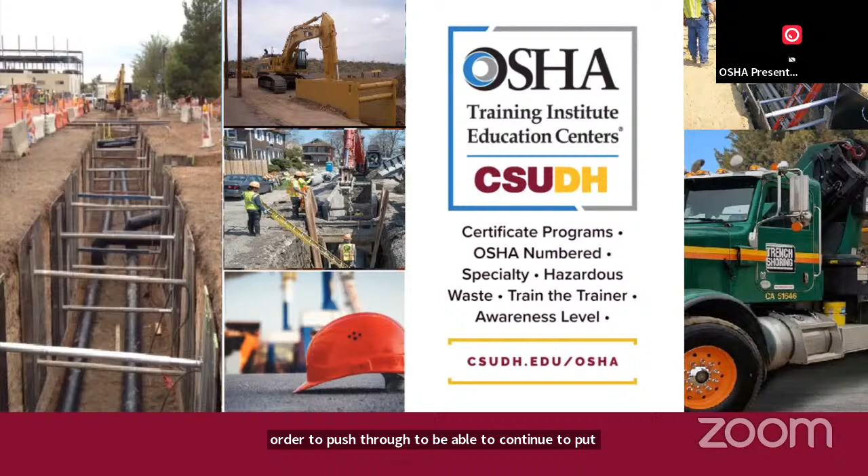So we were able to persevere and push through that through not just our side, but our audiovisual team, our IT team, the support staff that this OTI has, in order to push through to be able to continue to put these classes up there. I don't think we've skipped a beat whatsoever, and we've continued to put classes through, and we have not brought any of our classes to a pause or a stop.

I am the president and founder of a medical company called Shield Telehealth Medical Services. It caters to the correctional health facility where we deal with correctional health, DUIs, medical care for arrestees, Narcan, naloxone training for law enforcement and for first responders and thus forth.

I am also a current sitting police chief in Kern County for a small city by the name of Arvin, just southeast of Bakersfield. So I've been there going on 14 years, never envisioned taking the top spot. Very privileged to be able to do it because climate and culture equals change. And that big word that's out there in every profession, transparency, is what I truly believe about. And we push forward. So that's what I do.

My area is a specialty here, as I mentioned to your general industry, healthcare and train-the-trainer. Like I said, I love being a part of this facility.

I come here and moderate, as much as possible, as much as they'll allow me until I screw it up. But it's coming, I promise you.

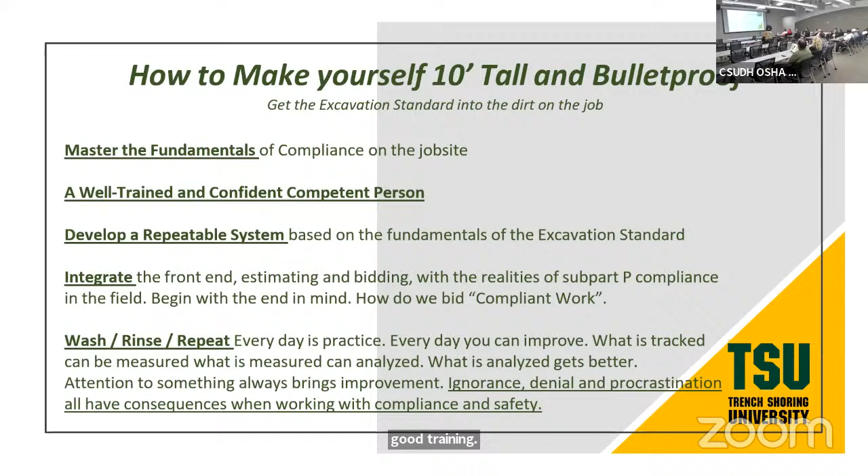So what I start with - I don't know, back in the day, you guys might remember Letterman, right? And the top 10 - we all love top 10. I'm old, so sorry if nobody knows who David Letterman is, I'm kind of dating myself there - but top 10 of the things I see that people struggle with out there trying to do this. I thought it would be helpful to approach it this way.

So number 10, we'll start at 10 and go to number 1: no T1 excavation permit. In the state of California, in order to excavate below 5 feet - and I'll talk about below 5 feet here in a second - you have to have what's called a T1 excavation permit.

To get that permit, you're going to have to submit your IIPP, your Injury and Illness Prevention Program, and you're going to have to show proof of a class like the one I teach, a competent person training class. And usually, I don't think it's policy, but usually they're going to ask you a few questions.

Here's how that goes down sometimes. I have people come to my class and I'll ask them, what do you do? And the guy said, well, we're putting a basement in. I said, oh, I know why you're here. He said, really? I said, yeah, because to put that basement in, you got to dig in the ground, and they asked you for your T1 excavation permit. You didn't have it. So now you're here because you got to take the class. Yeah, you're right, exactly. Okay, so you're going to learn a lot here today.

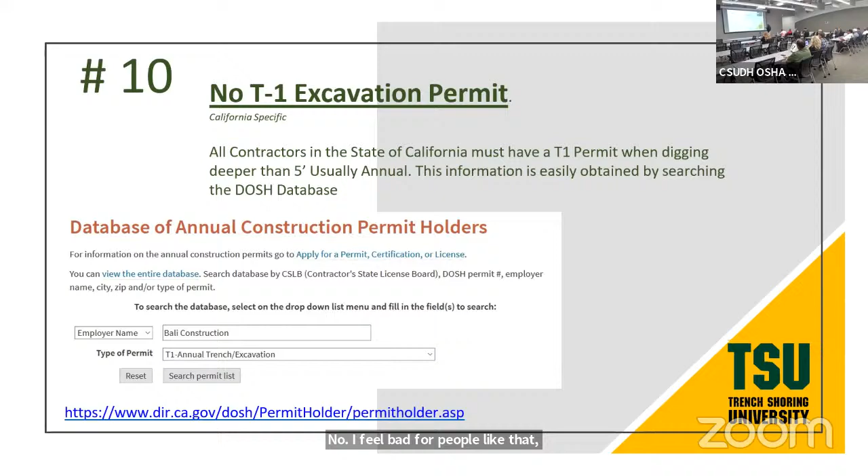All right, number 9. Daily trench inspections done, but not documented. So I got to have a really good conversation with Scott Ketcham. You must know Scott. Because I work with NAXSA, North American Excavation Shoring Association, I'm the training committee chairperson there. Doesn't mean a whole lot right now.

I was honored to take that position from two people who I consider legends in the shoring industry. But what we're really trying to do at NAXSA is figure out how we can best serve the industry as a whole. So we're part of the safety committee now. But the cool thing is I get to talk to Scott and I got to sit down with him. I asked him this very question because it's one that comes up in training all the time.

You see, in the OSHA technical manual, it says document all of your inspections. OSHA will not or cannot cite you for not having something written down, because the standard says you have to inspect. It doesn't say you have to write it down, but it says you have to inspect.

Let's talk about that. So here's the dynamics of how that plays out. So you're the competent person, you inspect, and hopefully when you inspect the trench with, let's call it hydraulic shores, right? So with hydraulic jacks, you pump up and put pressure in the cylinders and they hold up the trench wall. Well, how do you inspect something?

Most people, this is what they do. They call that an inspection. That's not really an inspection, folks.

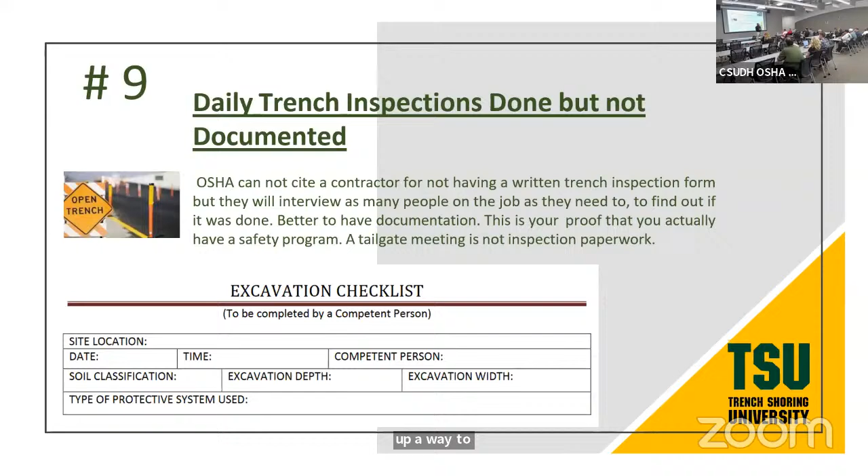Say people jump over trenches because they're trying to get somewhere. If you don't set up a passageway for people to walk through your job site, they're going to go wherever they want. One guy will go here, the other guy will go there. But if we set up a safe way to travel, everybody will go that way. It's something you actually have to do.

So daily trench inspection, not done at all. There's the guys who say we did it, and then there's the people who are just honest and say, no, we don't do that, which is a big no-no. Why? Because obviously there's a reason for that.

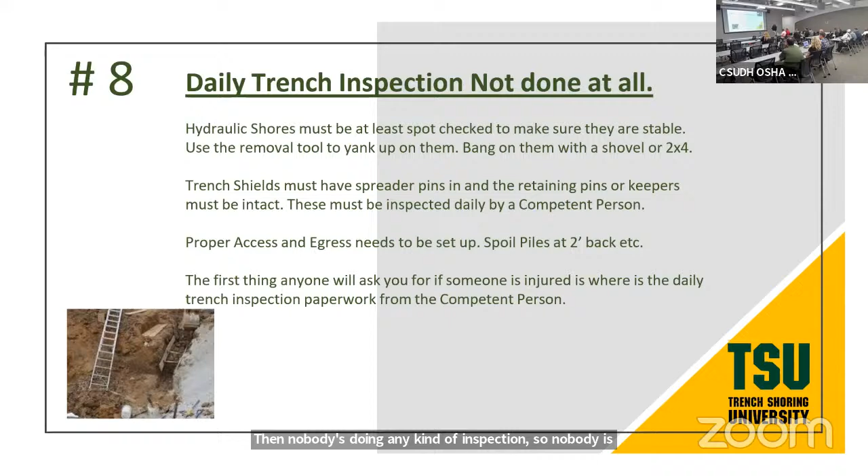When studies are done on fatalities, here's what they discover. Usually these main things aren't done. Number one, they usually don't use any shoring. If there's no competent person on site, nobody's doing any inspection, so nobody's looking at things. There's generally not a whole lot of training going on when no inspections are being done. So that's number 8. Number 7, job site crews not prepared to handle a surprise visit by an OSHA compliance officer.

I don't have many stories, right? So an owner calls me and says, can you believe this happened to me? And I say, at this point in my career, I could believe just about anything because I get a lot of phone calls like yours. So what happened? Well, a compliance officer came to my job site and started talking to my employees.

These are the questions they asked. He pointed to the trench and said, have people been in there? They said, yeah, people have been in there. I said, well, how deep was the trench? He said, about 8 feet. I said, how wide was it? He said, 4 to 5 feet or so. I said, okay. He said, but here's the thing. While people were in there, we had shoring in there. We had ladders in there, we had shoring in there, and people were in there.

And everybody left. We took out the shoring and left the ladder. So here's the problem. They asked, has anybody been in there? Well, they told the truth. Yeah, people have been in there, but there was shoring in there while they were in there. So here's the guy, he's looking at the trench and there's a bunch of footprints all over it. People have obviously been in there and there's a ladder in there. Now he's going to make some assumptions. Well, now the guy's in a pickle because he's trying to say that didn't happen. The compliance officer's just out there doing his job, writing down what he's looking at, and making a report. Same thing you or I or anybody would do.

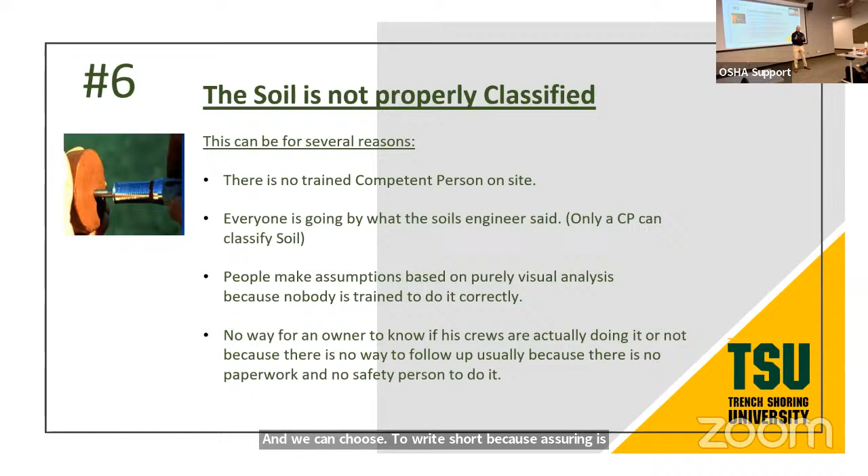And it's not rocket science, it's not meant to be. We classify soil so we have some idea how the soil is going to behave, and we can choose the right shoring, because the shoring is all set up according to the soil type. So we have to know the soil type first, which means somebody's got to be educated enough to actually do this work, okay, actually do it. For instance, with B soil, like I told you, I did that squishy thing, like you're not doing anything. So we show people how to do that.

So I asked him that question, or I tell them this, we kind of go over it in class and they're saying, wow, we didn't know that. Which is amazing to me, because I'm working with this big general engineering contractor. Don't be surprised when you think people should know things and they don't.

So anyway, I said, oh, would you want me to do it? Sorry, I'm going to step over here for a second, the water.

Okay, so we're going to do a soil test. Can you tell that I have fun?

Yes, Kathy, do you have a question? Ingrid asked, how long in advance should the soil be tested before starting the job? That's a great question, wow, this is really cool, I love really good questions. So not like I'm the authority on the subject or anything, but let's talk about that. How long should we test the soil, or how long in between the time we test it and the job starts?

Well, here's what usually happens. You bid the work, you get the work, you're trying to figure it out. So we'll get a call as a shoring company, we get a job, and we will look at a soils report. If we're bidding work, here's what I looked at: you got 40, 60 pages, however it is, blah blah blah, this happened 3,000 years ago, there's a river running through it, this and that, okay fine. I want to see what the soil is every couple of feet, so they'll tell you in bore logs what that is. And then they'll show you where groundwater's at and where bedrock is at, and those are the kind of things we're looking for. So I just flip through all that and go, there and there, groundwater, what's in the ground.

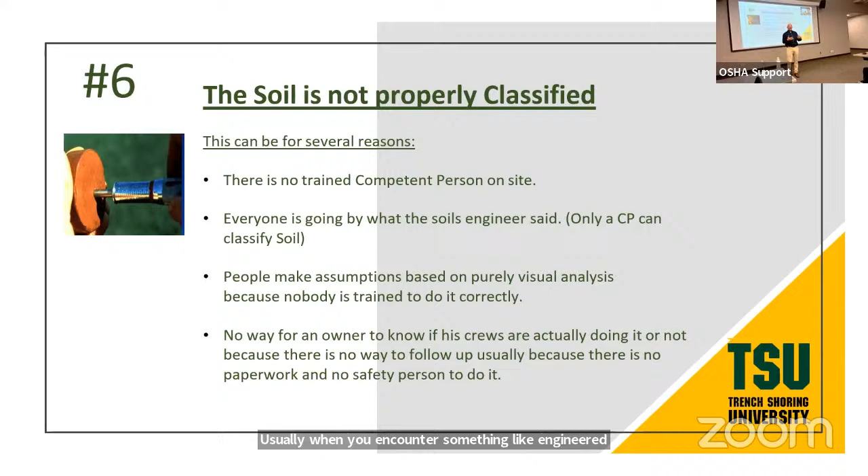As a competent person, you're going to have to sign off on something like that. So I always tell people, look, I'm going to do my own investigation, and if I have an issue with it, I'm going to call the engineer and ask him to come down and answer questions. That's the strength of a competent person. Sometimes engineering-centric companies who live and die by engineering, where that's everything that matters, kind of toss aside the idea of a competent person, to the point where the competent person doesn't feel like they have the right to even question anything. I'm here to tell you that's not the way to go. Why? Because a competent person is there now with the crew. Your engineers out there—I'm sure most engineers don't have a problem with somebody asking them to come down and look at something, if you have valid questions, valid issues. But that's a great question, and it's only come up once in all my training.

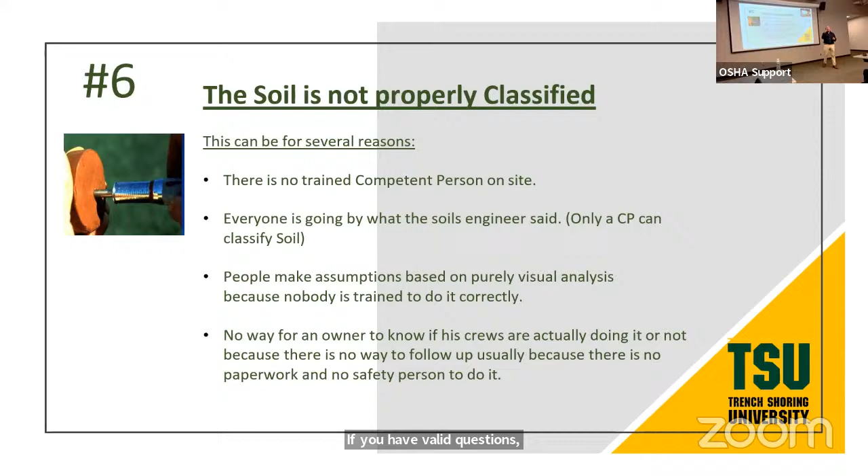Second time. I think we're good.

Number 5: there's tabulated data on site for the shoring equipment, but nobody's read it. Wonder why that is.

Why do you think more people don't read it? Okay, so they don't have it. Why don't they have it? It's online, it's available to anybody. Why don't they have it? They know what it is. They don't know how to read it. Don't know how to read it? Don't know where to find it? All valid, perfect, good answers.

Let's talk about it for a minute. This is our tabulated data, so it's 34, 35 pages, something like that, 38 pages. If it's just this many pages, this big, but you go online, I guess they're bigger if you just download it, 8.5 by 11, it's online.

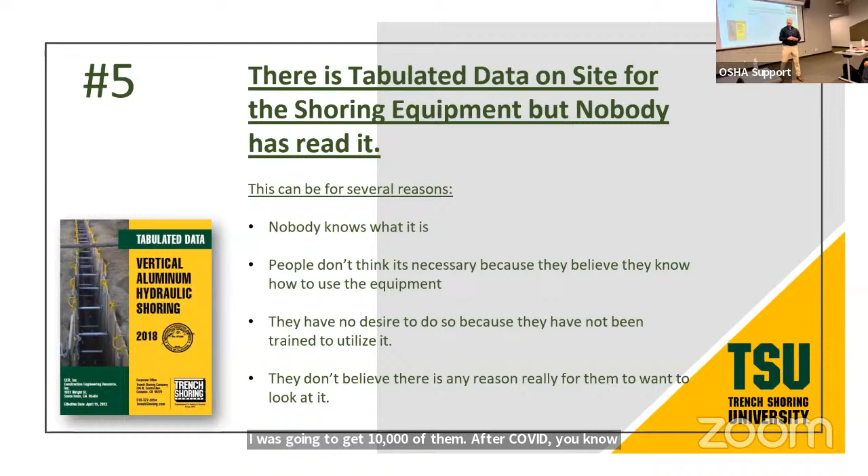After COVID, you know what the guy told us? No problem, we'd love to do that for you, just a kind of an increase in price though, you know, you understand COVID and everything, right? Sure, what am I thinking, 20, 30, 40%? We went from $2 each to $20 each. $20 for one, it's just paper. And I won't even tell you what I said to the individual because I can't repeat it. Just robbery, right? And so this is what happens.

So now we're dealing with the same thing when you go to print out these pamphlets. I'm not sure what the price, I think they were $1 a piece when we started doing it, I think they're probably closer to $5 a piece now, right? And the thing with being a manufacturer of shoring and handing that stuff out blindly to people, it becomes a huge expense, but yet it still has to be done. So I know that we're in the process of printing a bunch of them, but we're also trying to figure out how do we get this information into the hands of people who need it consistently.

Because people won't, we always try to train our desk people, ask, do you have the tabulated data? Do you need a copy of it? Oh, I don't know, maybe, yeah, I guess, or yeah, no, just send it. Okay, so we'll do that. And let's say you order 25 times, 10 shores, 15 shores, 5 shores, whatever, we're going to send out 25 copies of tabulated data. At some point, it gets to be a little bit wasteful, right?

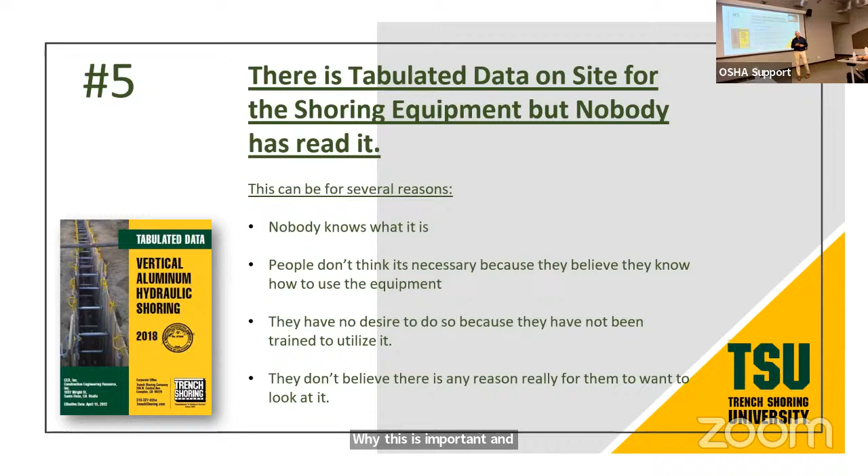Number 4, sloped or bench excavation is not done in accordance with Appendix B. Well, this is how people die. You have to remember that when you're sloping or benching, it's a protective system. You're not just out there scratching around in the dirt. It's done a particular way because that's the way it has been proven to keep people safe.

Now, if you need 32 feet wide to make something compliant, and you've only got 26, then you're 6 feet off. And I use this as an example. So let's say you're 6 feet off, that's 3 feet on either side. I don't know how that steepens the angle from a 45 that you need to something steeper, or from a 34 degree to something steeper.

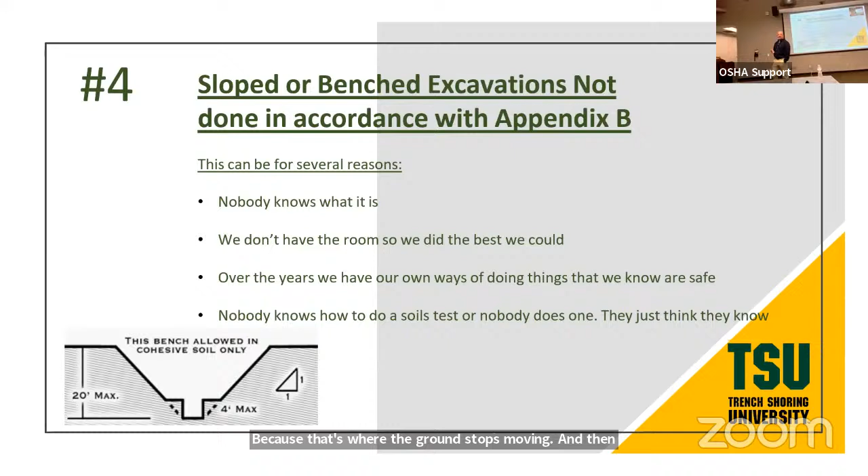But here's the thing. If you know you need 32 feet, because that's where the ground stops moving, and then you step over that line, how do you determine when you step over the line? How much do you step over the line? I mean, it's just a random decision all the time. Do you realize that you're randomly playing with people's lives? Do you realize what you're doing?

Right? I get it, I understand the mentality behind it. But compliance tells us that if we do things a certain way, people will be safe. Now, how do these people know that? Like, what makes them so special?

You see the movie Groundhog Day? There's a part of the movie where it just keeps repeating itself, right? And Bill Murray, he's kind of learned his lesson because he keeps doing the same day over and over again. You'd think you'd learn, right? So eventually he does learn some really important life lessons. But at one point he's sitting down stuffing his face full of cakes and drinking whatever he wants, because he's like, I'm not going to die, so I can do whatever I want. And then he says, maybe God is just God, like he knows so much because he's been around so long.

I really thought about that. It's like, that makes a lot of sense. If you're around long enough, you start to see - I'm 60. Now, a lot of us in trench work have been together for a long time, and I don't approach things the same way at 60 as I did 20 years ago. I'm still here, so I guess I'm doing something right.

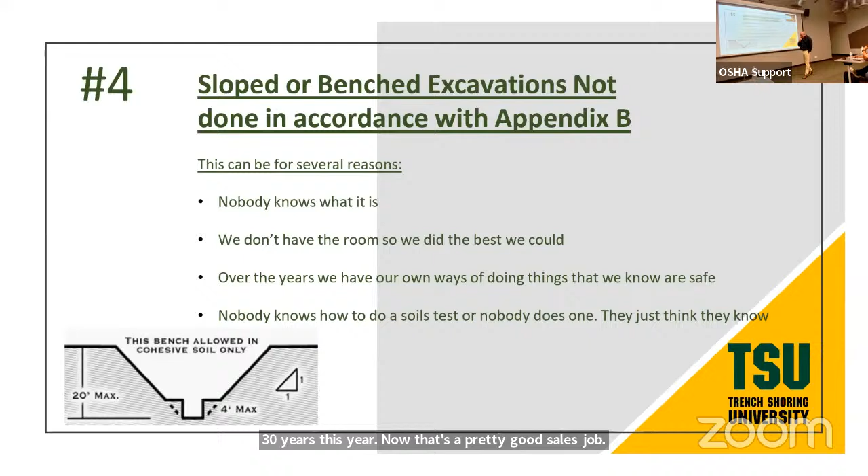I guess the point I'm trying to make here is that there's nobody who has a better idea about this stuff than OSHA. Those things are there for a reason. Man, if we learn to follow those things, we're not going to have all of these fatalities.

NAXSA, our mission at NAXSA, North American Excavation Shoring Association, is to do what? No fatalities, none. Can you imagine? No fatalities due to cave-in, none, zero, zip, nada. Pretty lofty goal. What is that from the movie Miracle? That movie about Herb Brooks and the hockey team when we beat Russia? Nobody in the world thought Russia could be beat.

And he's sitting there at the table with all these guys and he says, well, I think we can beat them. And the guy's like, pretty lofty goal, Herb. You're going to beat the Russian team who won like 19 straight gold medals or whatever it was.

I believe, maybe just stupid enough to believe, that we could do it. That we really could have a year where we had zero fatalities due to cave-in across the United States. Maybe that's why I'm the training committee chairperson, right? Look at that guy, he won't shut up and he's dumb enough to think stuff like that. So yeah, you go, dude, right? You go. I do. I get excited about this stuff because I believe in the human spirit.

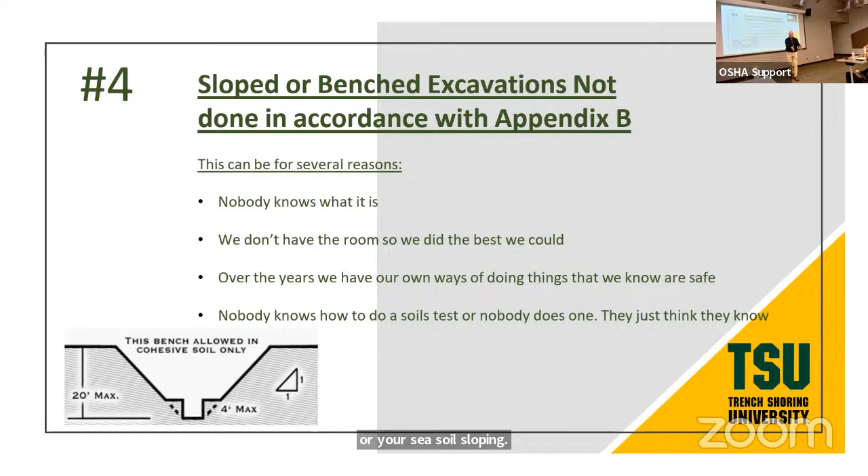There's all kinds of things that can be done when we get engineers involved. We do it all the time at trench shoring. We have C60 soil, that's a different kind of C soil than OSHA. OSHA only allows us to play with essentially sugar sand, OSHA C soil. But all of us who use shoring know of a kind of C soil called C60, or C soil that will stand long enough for you to put shoring in. So we can take that to an engineer and they can come up with some different things, because here's part of the problem: your standard C soil slope or C soil sloping is that pipeline manufacturers want vertical sides when we put pipes in, for pipeline integrity. And that kind of flies in the face of some of the stuff we have here for sloping and benching. So when we get engineers involved, we come up with some really cool stuff.

And the Murray guys are all nodding their head. They know, they've been doing this stuff a long time and they're still here. That's why, because they figured it out.

People get mad at me sometimes. I had a guy stand up in the room and throw his glasses at me because I was saying some things about less than 5 feet. And he said, well, if we believe everything you say, we'll just board this place up because we're not going to make any money, we can't do our work. Aside from dodging the glasses, I just said, well, other people do it. Other people do it, let's show you how. There's always an answer, it can always get done. I know it can be frustrating for people sometimes.

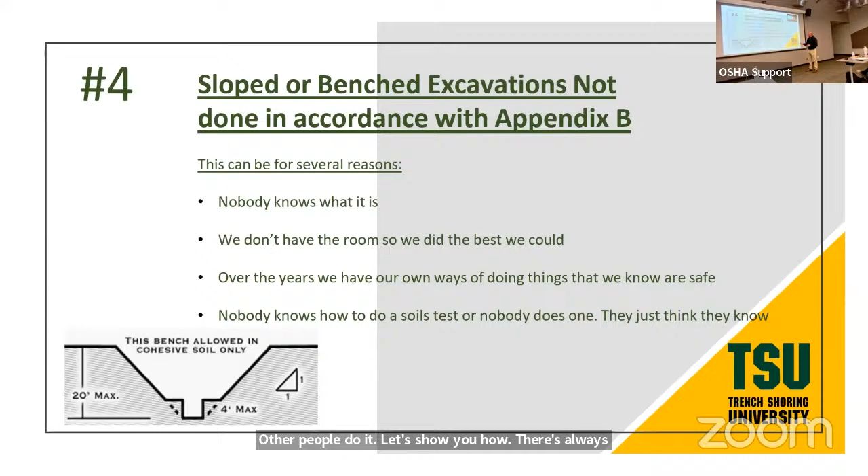Ladders and spoil piles are not managed so they're compliant with the standard. This is just one I really believe of, it's a tough thing to do, people climbing up and down ladders all the time, so they don't set them back where they stick up 3 feet out of the ground.

One of the things I talk about in training is there's 3 things, if you're a competent person, that you need to think about: 1, what I see. So here's a little exercise, think about doing it. When you come back from lunch sometime, get yourself away from the job and come back. What you're going to do inside your head is play OSHA compliance officer. So this is one way you can look at your job, take yourself out of what you're doing, and try and find violations on your own job.

So I come back from lunch. What do I see? Do I see a ladder sticking up 3 feet? We all know it's basically 4 rungs on a ladder, the 4th one being even with the ground. That's basically how you can tell, so it's easy to spot when your ladders are out of whack. Do I see anybody that's roughly more than 25 feet away from a ladder? Your ladders can't be any more than 25 feet away. Do I have trenches out there that are deeper than 4 feet that people are in with no ladders?

All right, do I have spoil piles that are not set back a minimum of 2 feet? Are my spoil piles running to the edge all the time? Do I have spoil piles that are 10 feet tall at 2 feet back?

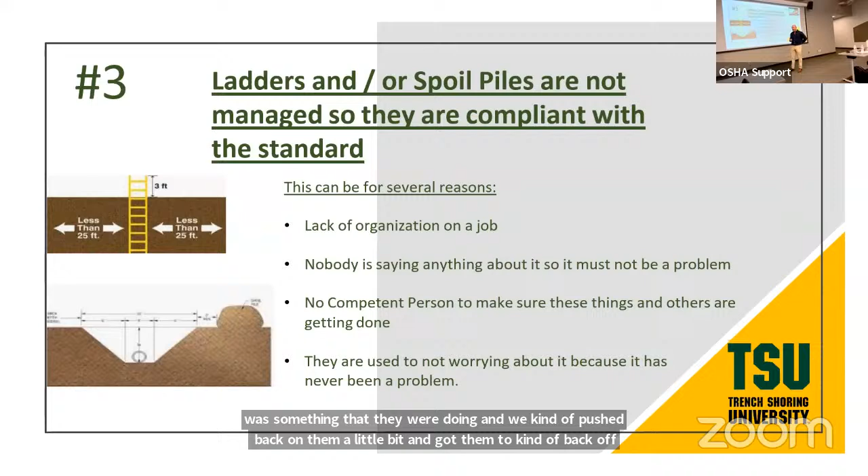So EM 385 is a different animal — it's a US Army Corps of Engineers spec, not an OSHA spec that we're shoring to. In that kind of situation, they were pushing people to test even C soil, and we pushed back on them a little bit and got them to back off, but that was a couple of different bases. It's a great question because it has come up.

All right, I'm going to have to boogie a little bit. No trained competent person on site, number two. That kind of is self-explanatory — you have to have people trained, okay, and good training.

I just did a thing with trench shoring where I was showing all my people about trench shoring. You can go online and get a certificate that says competent person on it for $29, $59, $79. Nothing against these people, I haven't taken their trainings or anything else, but I think the point is obvious.

Menu-driven courses are great for showing a brand new person what this stuff is all about. But training a competent person, I mean, you just listened to me going through a million different things here, and I've only been standing here an hour. My class is 8 hours long, 7 to 8 hours with lunch and stuff, and even then I'm thinking of expanding it to a 2-day class. We do a class here that's 3 days at the university.

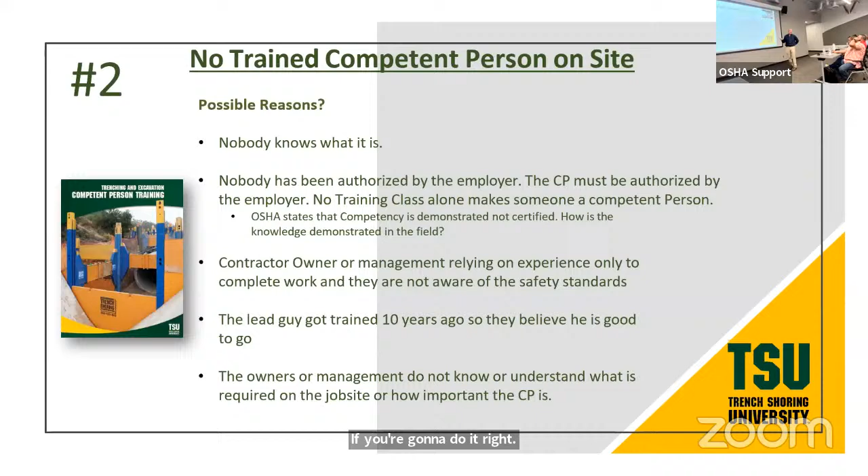So how is the training getting into the field? I urge you to follow up on that because that's the hardest part. Follow-up is always the hardest part. Everybody knows you should get this stuff done, people send people to training and we get our certificates, and I'm a sub, the general says 'I need to see your certificate.' Here's a certificate. Okay, great.

And then I get guys like Warren here who run safety for general contractors like McCarthy, and they say, can you believe I'm dealing with this right now? You can't believe what I'm going through with these guys. Now, we're fortunate, we get to deal with a lot of people like Murray Company, if I can throw that name out there, who've been around for a long time. They'll have issues with people like that.

Okay, so here's another thing. The first thing I said to Warren was, well, who are you working with? 3-bid, low bid, I get it. We all understand 3-bid, low bid. But I remember having a discussion with a guy from the city of Los Angeles.

He's complaining about why they have all these safety violations on their job from this contractor. And I know who the contractor is. And I say, well, you hired him. You can't hire turtles and expect them to run like rabbits. There's a reason why things cost money.

Golly gee, I mean, trench shoring, there's nothing fancy about what we do. But here's the thing, the owners have always said, if we can't pick up something within 48 hours, we buy another truck. You know how much those trucks are? I think they're well over $400,000 each for a boom lift.

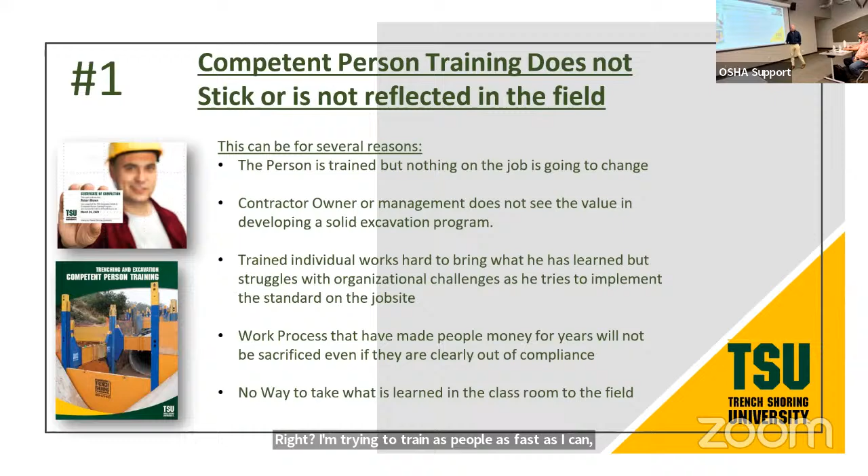I'm trying to train people as fast as I can, but I'm here to tell you that there's people who just don't get it. And they will at some point if they're going to stick around. All right, so here we go.

To end, I'm going to go through this pretty quickly, but successful trench and excavation programs have the following: a top-down understanding of the value and importance of having excavation safety as a real priority, a real priority, a safety pays mentality, and the ability to identify how the excavation standard is reflected in the excavation work they're doing.

A culture of understanding - I'm already late on it, she's giving up on me. Am I right? It's 2 o'clock. You gonna shut me down? Am I good? Okay.

A culture of understanding what the excavation standard is on a job and what it means. A well-trained and motivated, competent person who's 100% supported - huge right here, 100% supported by management. And who reads the standard? Who reads the standard? I say it three times. Who reads the standard? Why do I say that?

Because I have situations where the people in the field are watched over by an owner, general superintendent, whatever. We train the people in the field, but the guy who's looking over that guy or those guys, he doesn't know the first thing about what we're doing.

He doesn't know anything about safety or trench and excavation safety. Have you even read the standard? But you're the guy who's watching to make sure they're doing it. That doesn't work, it seems to be, right?

An end-to-end understanding of what compliance means from estimating and bidding all the way through completion. I talked about that, why that's important, because if the work's bid right, the guys in the field get what they need consistently. Solid communication and respect between the field and the office.

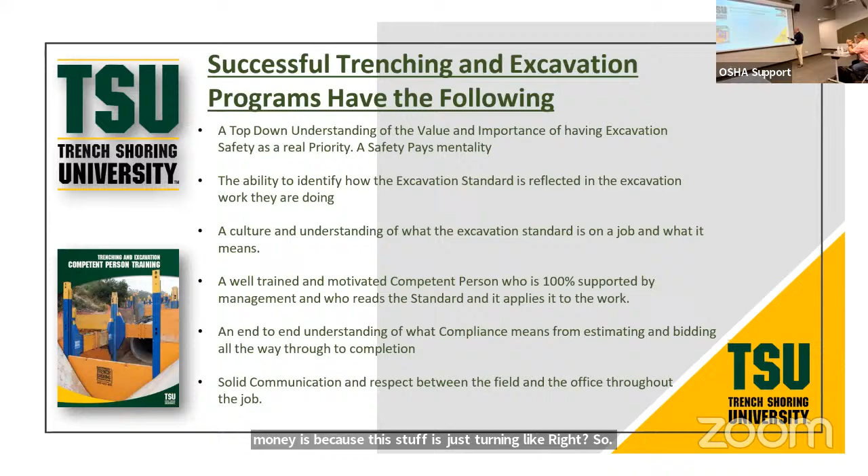So in the fundamentals, we have a competent person. He understands how to get along with people. That's a big part of it. We're all in this together. Use situations that seem to create conflict to learn and teach from. Do this by being committed to reading what the standard says and being accountable to it. Showing someone something is always better than telling them.

Why do I think this is so important? Here's why. If I have a manual, if I have a book, the dynamics of this are amazing. But here's what's going to happen. You and I are talking about something. Instead of me telling you something, I'm going to ask you if you will look at something with me. And when the two of us look at something together, now we're standing here next to each other and we're both looking at something. We're not adversarial.

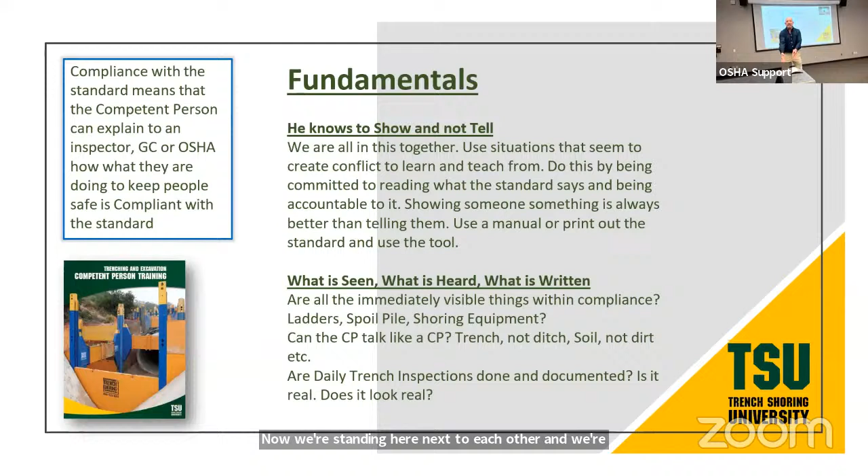When you're standing across from somebody and you're playing a tennis match, ping pong, whatever you want to call it, it's adversarial. When you take the dynamics and you change them to two people looking at something together, you create a whole different scenario.

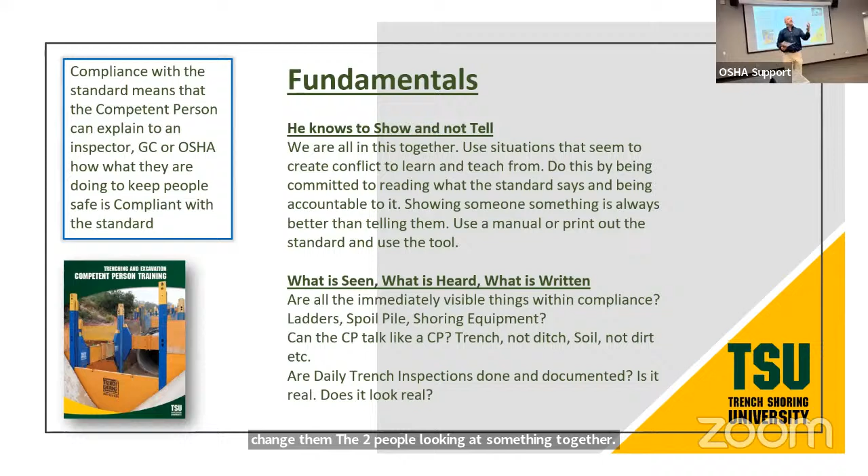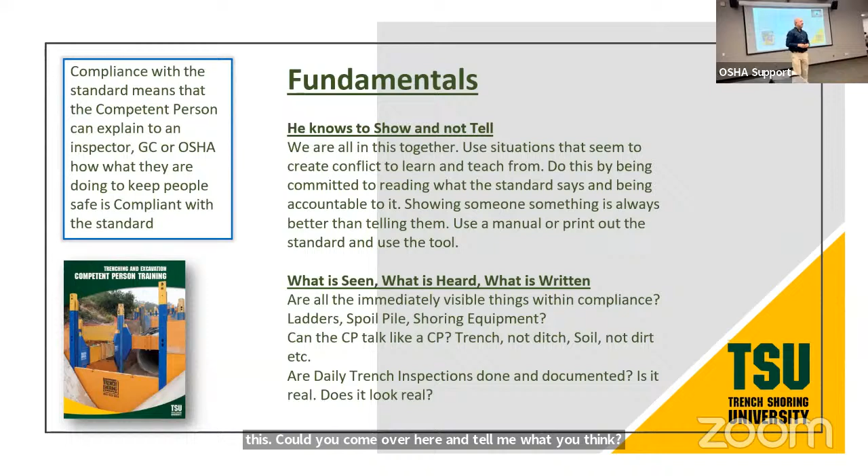I'm not sure how things are going. You're working with a contractor, whatever. We've talked a lot about this. I was looking at this. Could you come over here and tell me what you think? What do you think about this? When you have people that can think about things like that, everything works so much better.

I talked about what is seen, what is heard, what is written. We talked about engineering and how important that is. Tabulated data, the appendices of the standard. The competent person knows how to read and apply all this stuff. That's what we do in class.

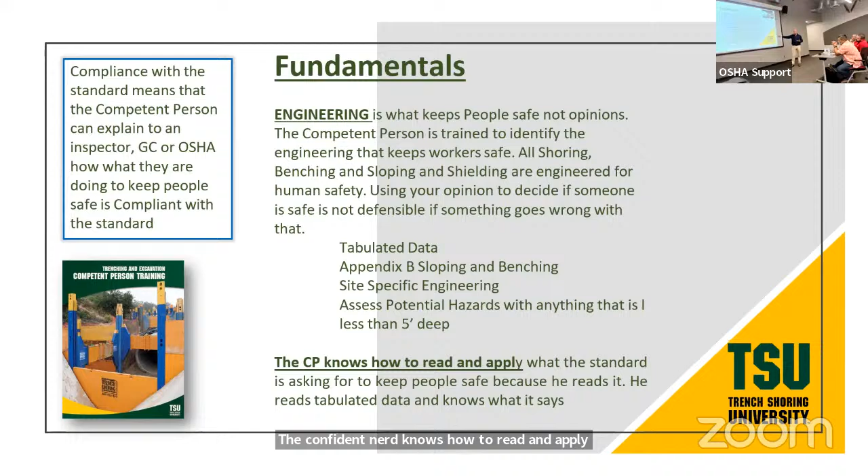Good training, engaging and interesting, draws people in and makes an impact, creates an opportunity for engagement, builds people up, empowers them, gives them confidence, creates a pathway for success in the mind of those that are trained, and creates a resource to draw from in the future of the job.

The standard is taught through real examples by somebody who has more than just book knowledge, but practical experience, with opportunities in class to demonstrate what it's learned. These are all things of training. One of the greatest questions somebody asked me one time, we were quoting them and they said, tell me why I should take your class.

Wow, I wish everybody would ask me that question, right? Because people just sign up and send people in. They don't even vet it out.

They don't even know, repeatable system. I talk about McDonald's a lot in my training, but the thing is, we all go to McDonald's at some point. Why do we go? Because they produce the same thing over and over and over. We know what it is, and no matter where we go, it tastes the same, and we can get it in 10 minutes. That's it. Not because it has incredible nutritious food or any of those reasons. They're a Fortune 100 company because they produce a repeatable result.

So that's what we're trying to do. We're trying to get people home at the end of every single day. How are we creating a repeatable result where we can insert people into a system?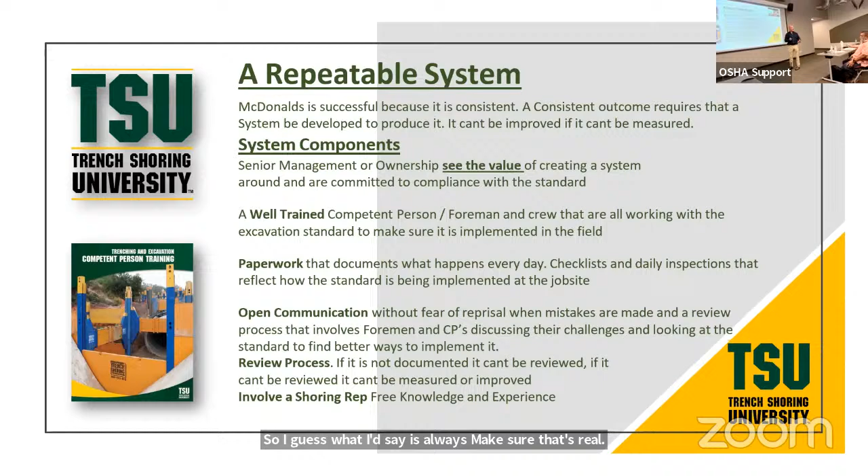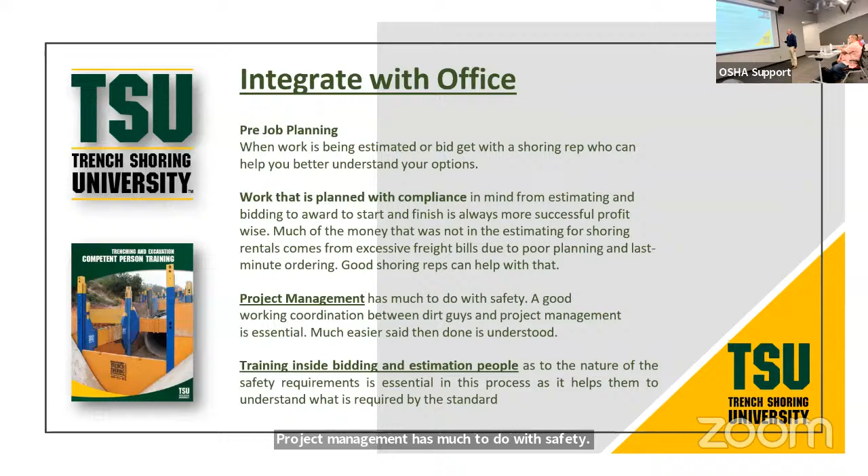Integrate with the office - I've been saying that a lot. Project management has much to do with safety. A good working coordination between dirt guys and project management is essential. Training inside bidding and estimation people too, right? We talked about that. Resources.

I'm always surprised at how often I overlook things that are here for free that I never take advantage of. That's a perfect example - who we are, the trench shoring company. I spend a good half hour in my training helping people understand that, and that's why we have reps come to my training, because most people don't even know that's available. A culture of safety - I think we all know what that is.

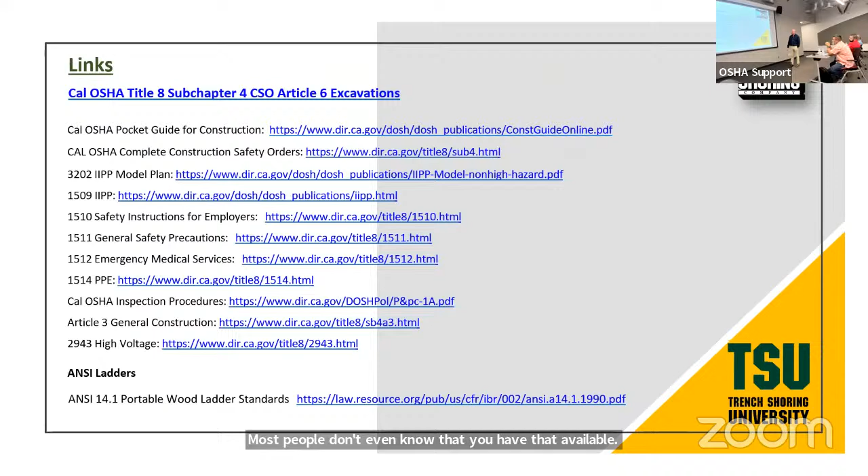And I've gone way past my time, as always, because I don't think I've ever met a timeline. I'm grateful to you guys for letting me continue to yammer on, because as you can tell, I'm passionate about what I do. But I guess it's time for questions, if we have any time - maybe that's all gone too. So I don't know, I'll let you guys figure that out. Questions? Everybody's like, no more, please. Okay.

So my question is, what is the best method of soil testing? Great question. Well, I can just give you my best, okay?

The only reason I think I'm qualified to answer this is because when I worked for the military, the Navy actually brought me in and said, we want to train like 500 people, and here's the deal, we can't pay you. Typical government thing, right? Want everything for nothing, and yet I got to pay, right? But here's what he said: if you do it, I'll expose you to every single contractor working on a base here at Camp Pendleton. They'll have to come to these trainings and you can meet everybody and get cards. Okay, there's some benefit there. And that's how I got on at Camp Pendleton, and I was a fixture there for a long time.

Now what worked? So we had everybody out there in groups of 5 people - I had maybe 10 groups, 50 people at a time. And we went through all these soil tests.

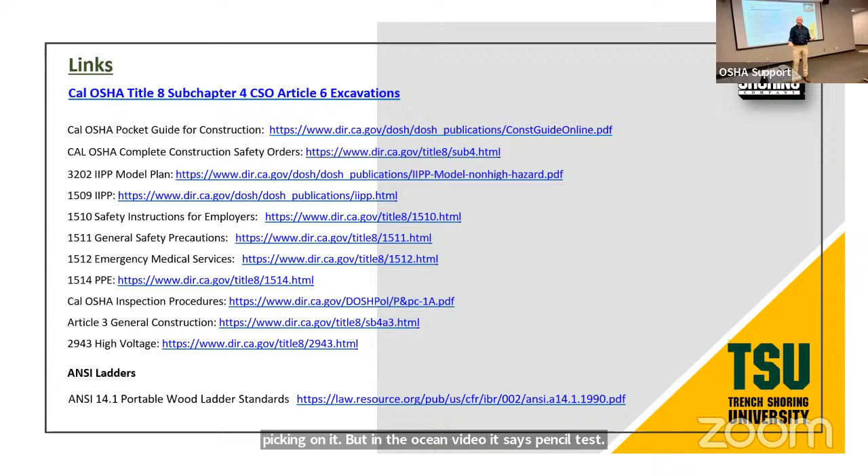But in the OSHA video, it says pencil test. Now where did they come up with that? Pencil—there's no word pencil in the manual anywhere. Not pencil test. It's called a thread test, okay?

So you can roll it out on something flat, and if you can pick it up without it falling apart, that is a good B soil test, and it works every single time. The really cool thing is you got 10 people, they all come up with the same result. My dad used to call that idiot proof. Call it what you want, it's producing a consistent result.

So here's what I do for that test, and I use a pocket penetrometer. Pocket penetrometer will be accurate. You take a chunk of material, and then you're going to take a couple of different samples, but one will confirm the other. And here's a really cool thing—when you actually do it, it changes the way you think about things.

It really does. Soil testing—another great one for cemented soils, because you can't do a thread test on cemented soils, is a dry strength test. I've been using this one in my class and experimenting with it a lot. With a dry strength test, if you toss a clump of soil on the ground and it's cohesive B soil, when it hits the ground, the impact will only maybe break it in half or a couple of pieces, and then you can't break it up with your hands.

But more often than not, I get in there—this one job site I was telling you about, when I went out and checked the soil for them, they all said it was B soil. I go out there and say, okay, here's your B soil, you guys all think it's B soil? Yep. So I had a chunk of it and tossed it out in front of them. When it hit the ground, it just fell apart, and they all reacted—oh no. They had to change all their shoring. They had to change their sloping because it was obvious it wasn't B soil.

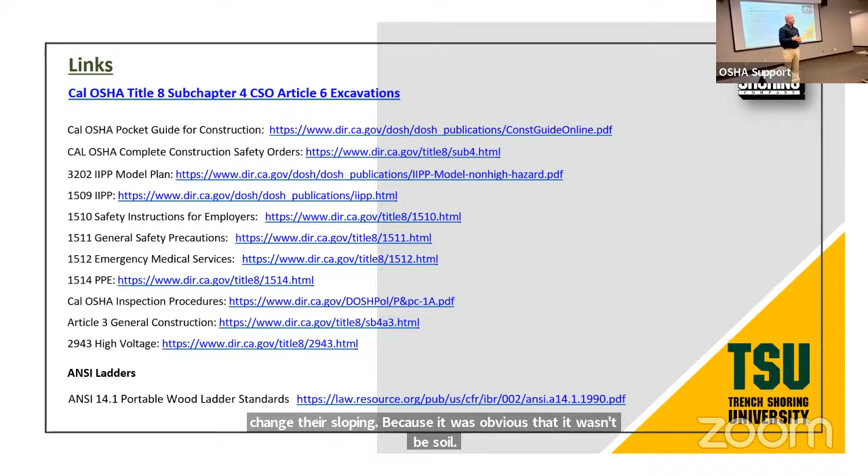So that's the power of testing soil. Really, it does work when you work it. Like AA—works if you work it.

Come rescue me, okay, because I'll just keep talking. All right.

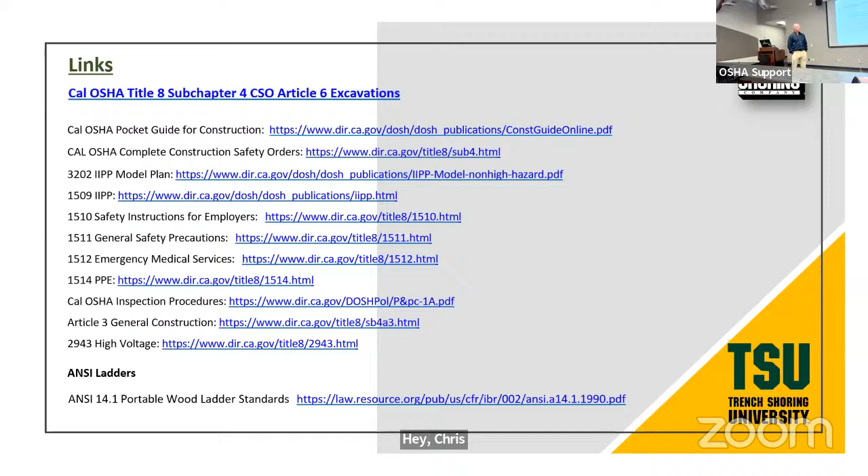Hey, just for the record, one typo on your slide—the McDonald's example, a good repeatable system in the food industry is In-N-Out. We'll work with you on that. Even though we don't endorse anything or any products and all that. So, I agree with that.

Yeah, welcome. So, and one other thing too, if we offended OSHA, he is only a contract speaker for us. Right? So we'll be revisiting everything else.